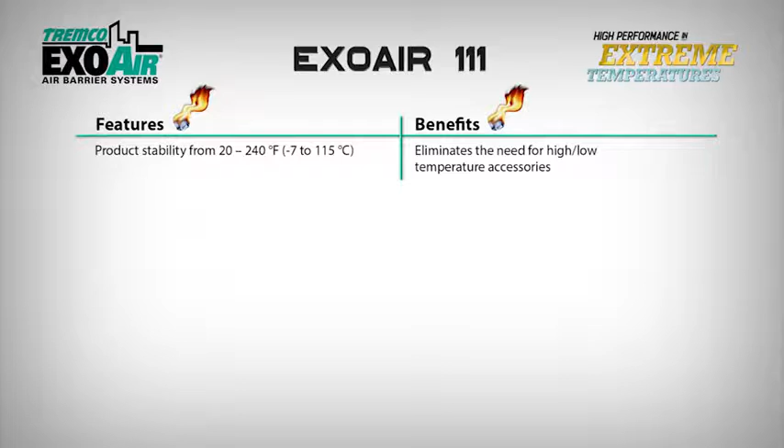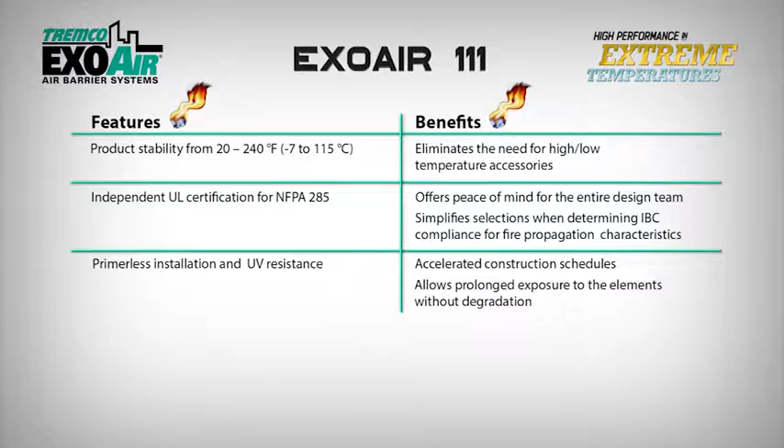It has achieved independent UL certification for NFPA 285 and is uniquely formulated for primerless installation and UV resistance. EXOAIR 111 is manufactured with a uniform 24 mil thickness and a metallized facer, providing low heat absorption.

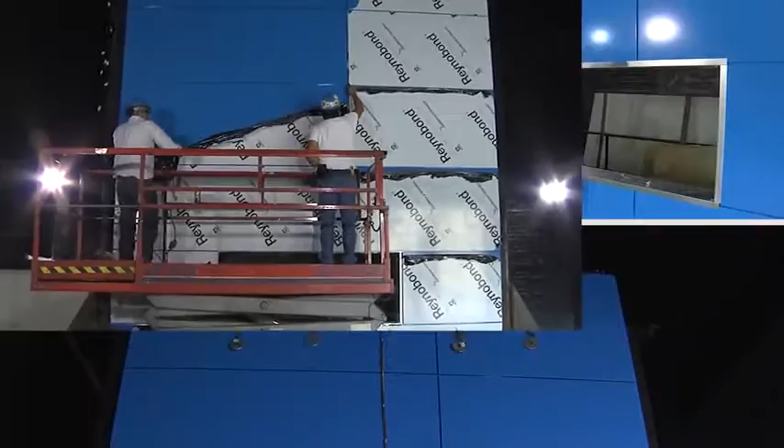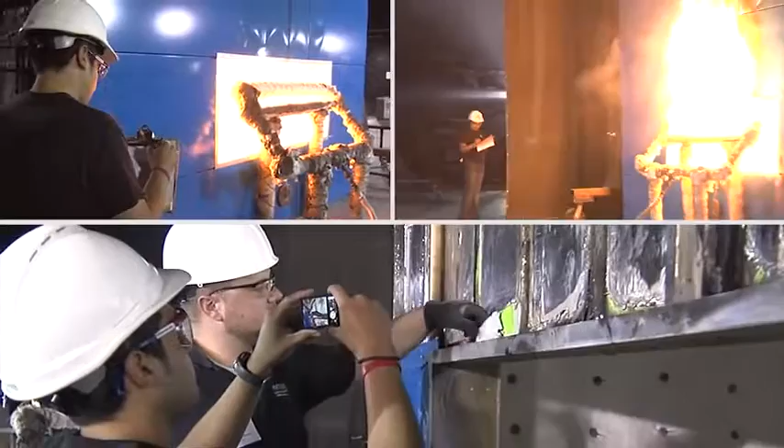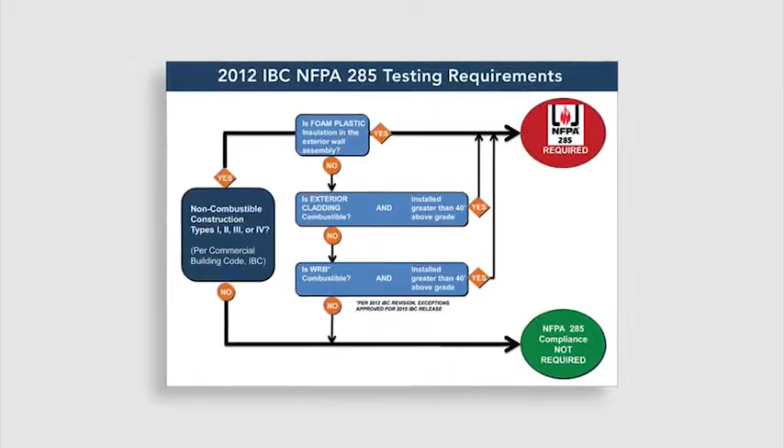NFPA 285 is a flame spread test for a fully constructed two-story wall assembly. The test assembly is exposed to standardized fire conditions to determine if a combination of wall components present a risk for flame spread on the exterior of a building. NFPA 285 has been conditionally required for exterior walls with combustible water-resistive barriers since the 2012 International Building Code was published. There are combinations of wall components that make every wall assembly unique.

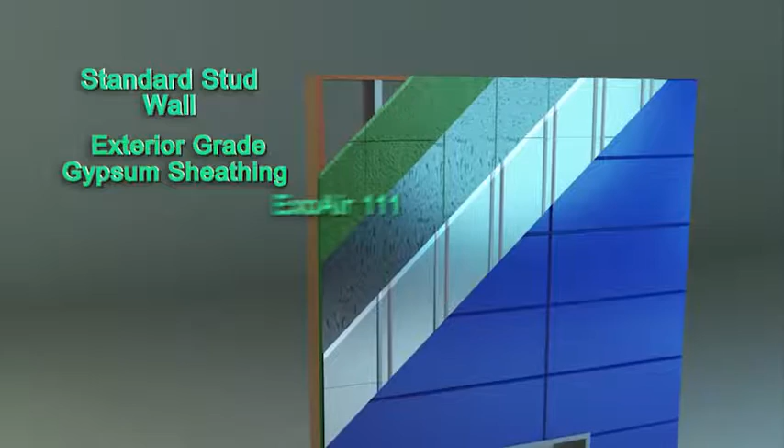During evaluation, careful consideration must be given to each element within the wall structure, such as the structural build, the air barrier membrane, type of insulation, exterior cladding, etc. This wall assembly combines a steel stud structural wall unit with Tremco EXOAIR 111 air and vapor barrier membrane, continuous polyisocyanurate insulation, and aluminum composite panel facade. The wall assembly was tested at Underwriters Laboratories, Incorporated.

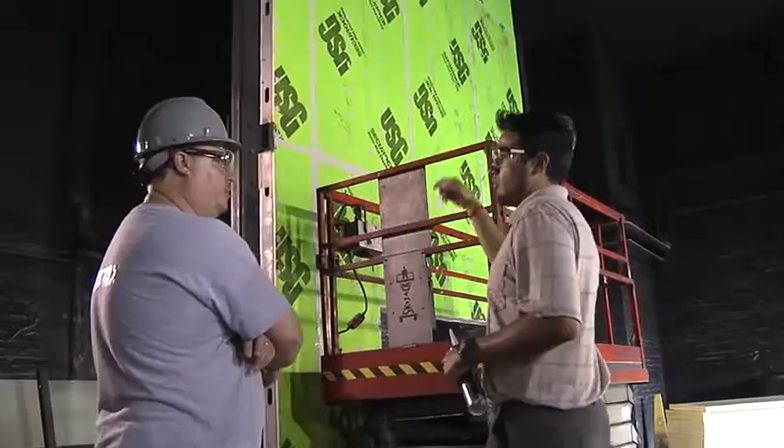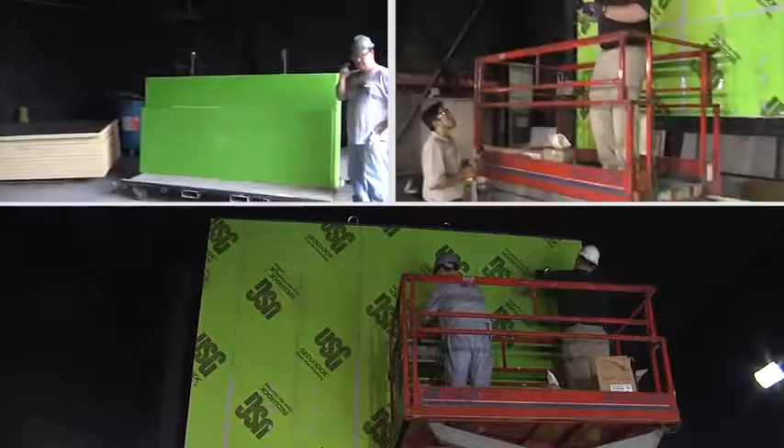The process begins with the construction of the wall assembly. The base structural wall includes 4 inch-long 16-gauge steel studs spaced every 16 inches on center, with 1/2 inch thick interior gypsum wallboard and 5/8 thick exterior gypsum sheathing fastened to the steel stud structure according to the manufacturer's installation instructions. The next step involves detailing.

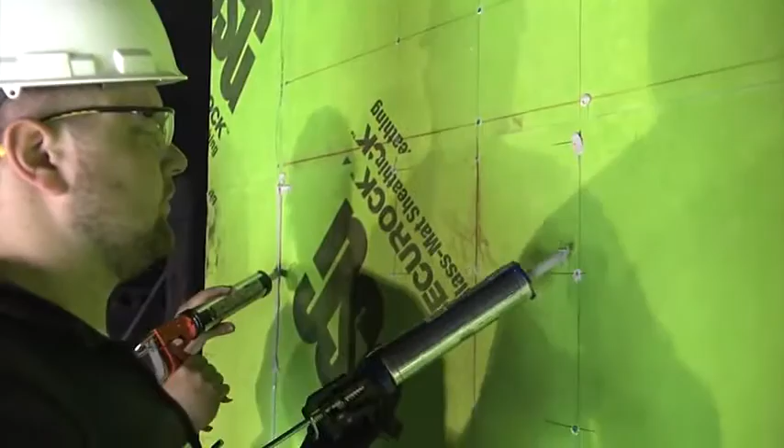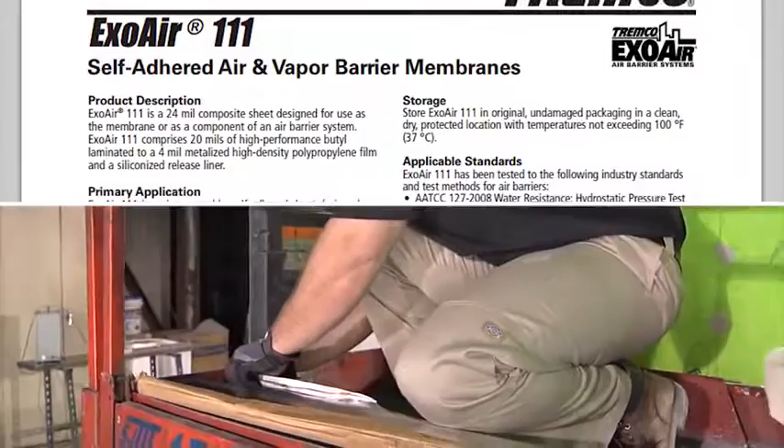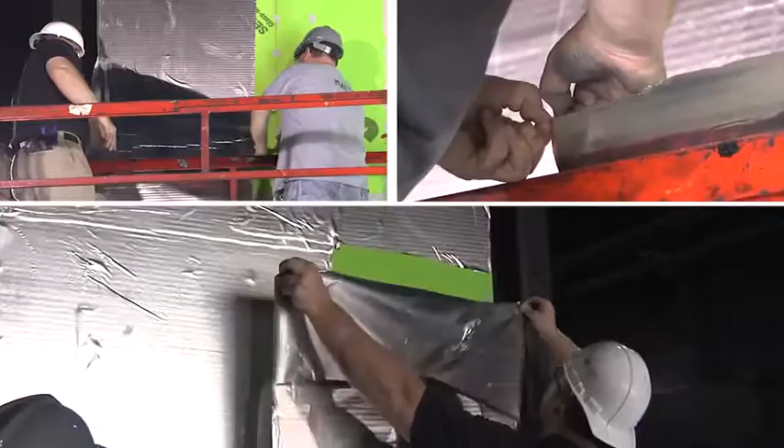In commercial construction, it is best practice to detail all board joints and fasteners prior to installation of the air barrier membrane. For this wall assembly test, all detail work is completed with Tremco's Dymonic 100 single-component polyurethane sealant. After detailing is complete, the air barrier membrane must be applied to the wall according to the manufacturer's application instructions. Tremco's EXOAIR 111 air barrier membrane is primerless, meaning it can be directly applied to the substrate, saving time and labor. Prior to application, it's important to cover the rough openings near the window-to-wall connection.

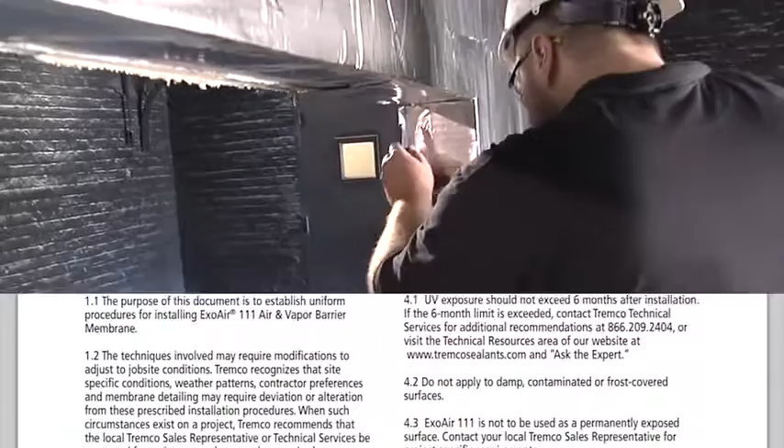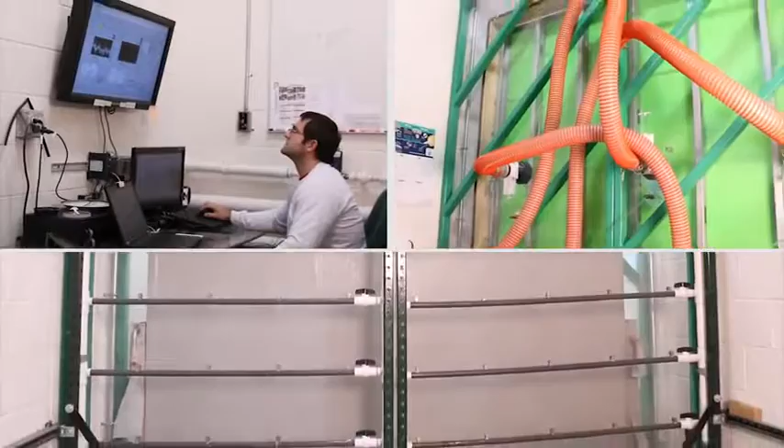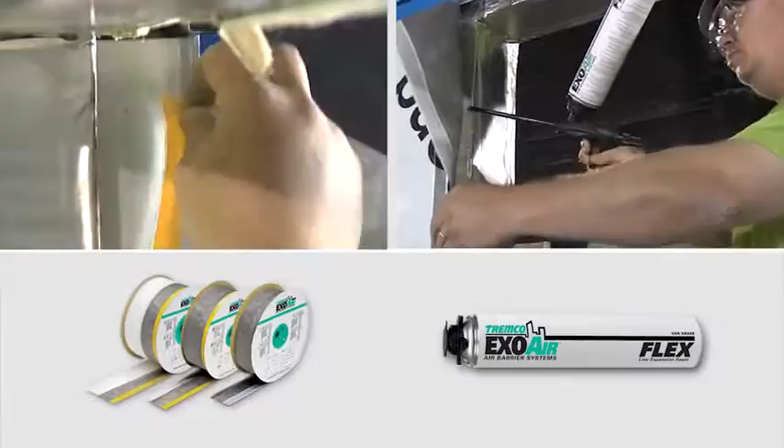Apply the approved air barrier membrane according to the manufacturer's application instructions. Please note that NFPA 285 does not account for, and the building code does not require testing for, fenestration products, such as window flashing materials. At Tremco, our focus is on providing documented system performance for the entire building enclosure, from below grade to roof, including transitions. For this test, Tremco incorporated EXOAIR Flex and EXOAIR Duo, 2 accessory items that ensure a fully sealed air barrier system when connected to the window perimeter.

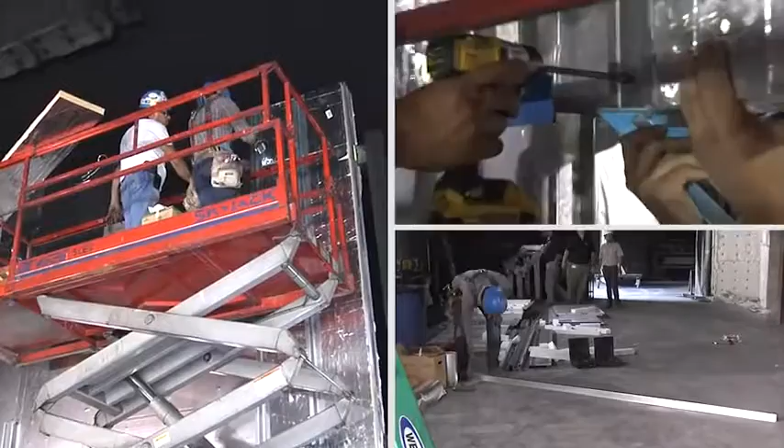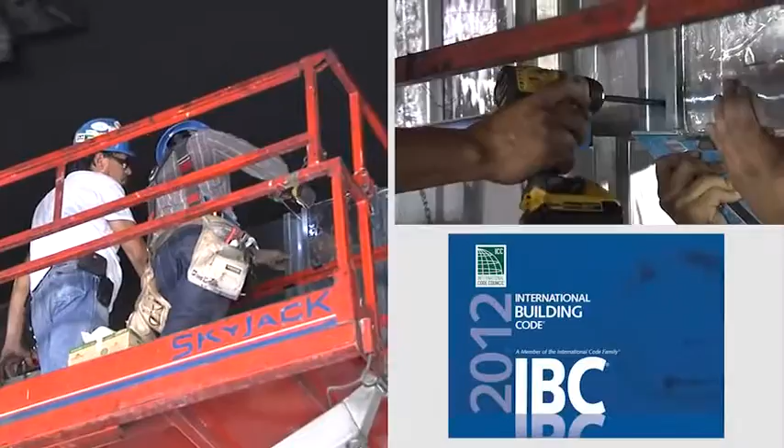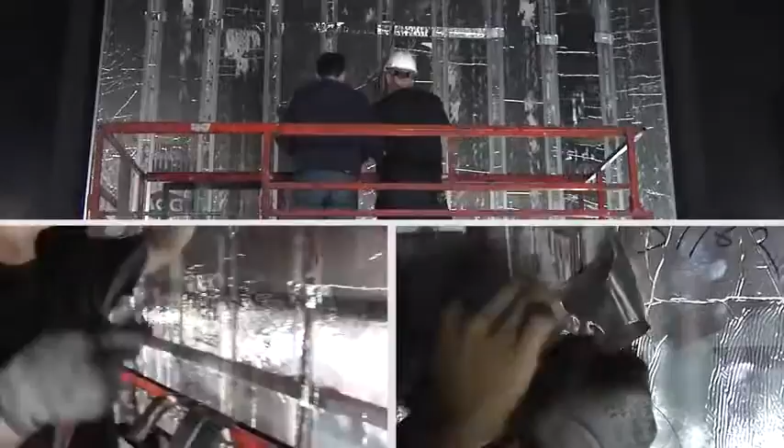The testing process continues with the installation of 2 inches of aluminum foil-faced polyisocyanurate and metal hat channel system according to the product's application instructions. This construction assembly provides continuous insulation as required by the International Building Code. Prior to testing, thermocouples are placed throughout the wall assembly to monitor temperature fluctuations during fire exposure. The thermocouples have individual set limits that cannot be exceeded during the test. Metal panels are anchored to complete the wall assembly.

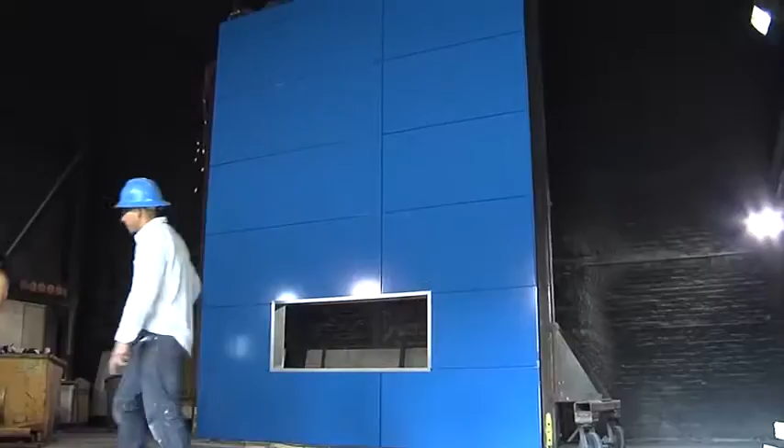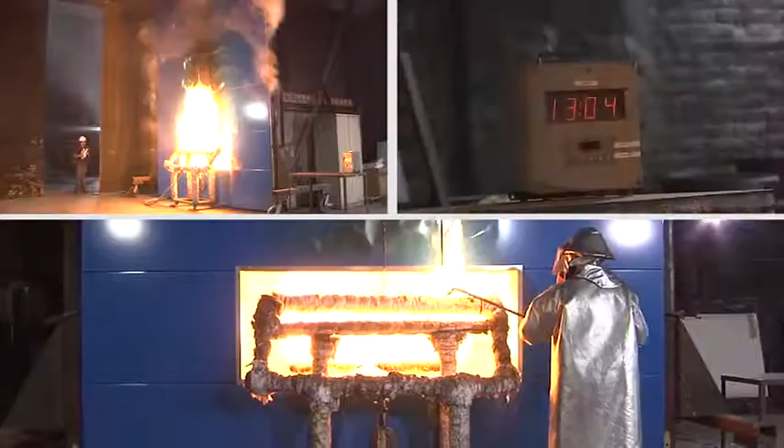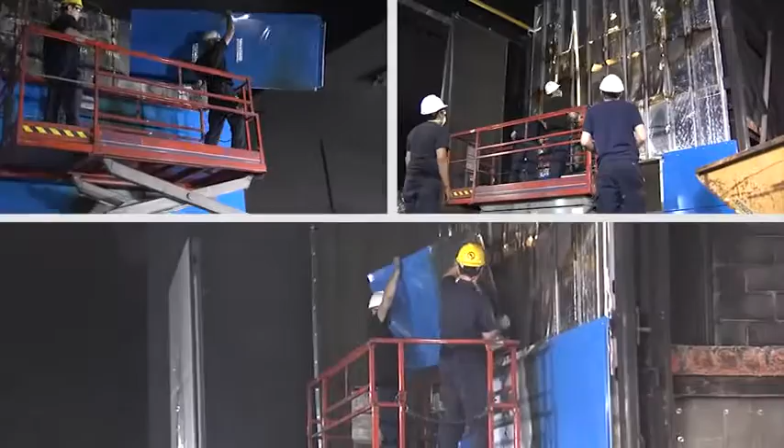Once the test wall assembly construction is complete, the fire source is moved into position and ignited. The fire will be supplied to the wall for a period of 30 minutes. During this time, none of the preset temperature limits can be exceeded throughout the wall assembly. Once the 30-minute time limit is met, the fire source is removed and the self-extinguishing characteristics of the wall assembly are observed for an additional 10 minutes. After the wall assembly has cooled to a safe point of handling, it's deconstructed and the extent of fire damage is recorded and analyzed.

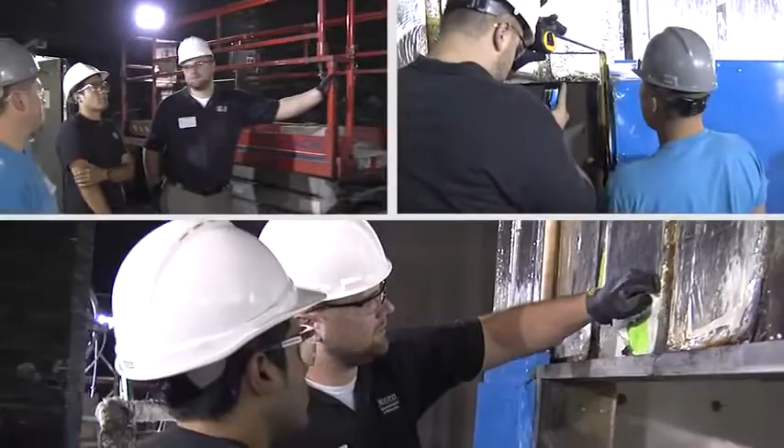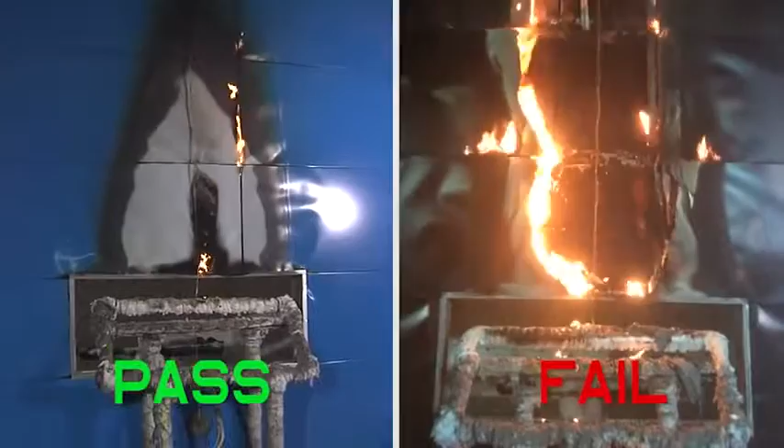After removal and analysis, the test results show that EXOAIR 111 protected the entire exterior sheathing, leaving it untouched and appearing as though it had never been tested. There are a variety of materials and wall assemblies that meet NFPA 285. This side-by-side photo comparison exhibits assemblies that have passed and failed the rigorous testing process. Some assemblies require the installation of mineral wool around the window rough opening due to the flammable nature of the other materials in the wall cavity.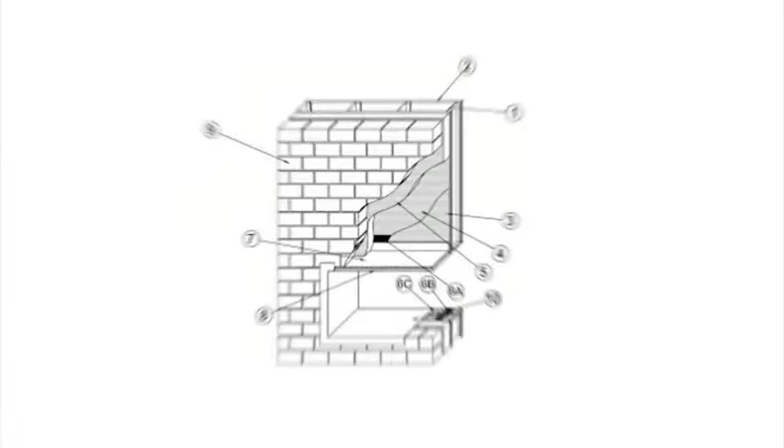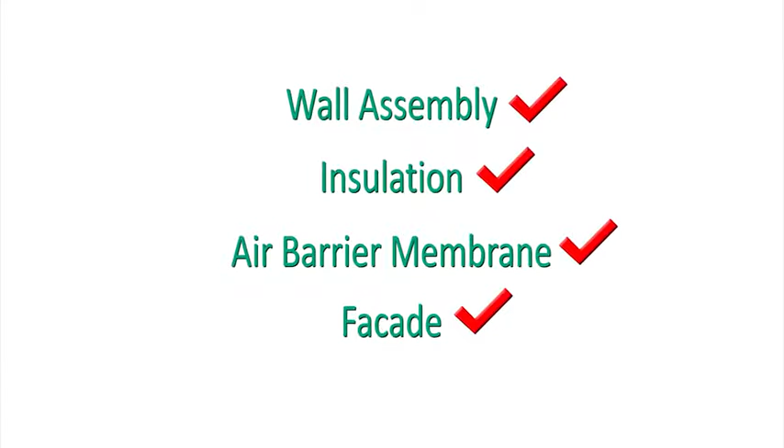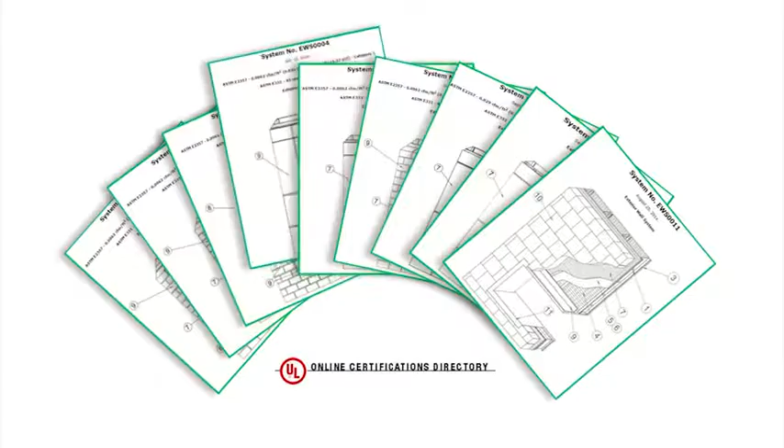In order to meet the NFPA 285 requirement, a wall assembly must contain test-approved products or be reviewed by a qualified engineer familiar with the fire characteristics of building materials. Products have to be evaluated in a variety of NFPA 285 assemblies before a valid engineering judgment can be made. Tremco has multiple tested assemblies listed with Underwriters Laboratories Incorporated that meet the requirements of ASHRAE 90.1 as well as NFPA 285. This makes it easy to identify what system components were tested and evaluated.

To access Tremco UL-listed NFPA 285 assemblies, visit www.tremcosealants.com. Click on Technical Resources on the right side of the toolbar and scroll down to Technical Bulletins. Locate the ASHRAE 90.1 and NFPA 285 defining and specifying to meet IECC and IBC bulletin. Click on the UL listings for Tremco underlined and highlighted in blue. The online UL certifications directory will appear. Type in Tremco and FWFO for the UL category code and then click on Search. The listing of Tremco NFPA 285 assemblies will appear. Click on FWFO.EWS0011 to pull up the EXOAIR 111 NFPA 285 assembly, which contains a detailed listing of the components used.

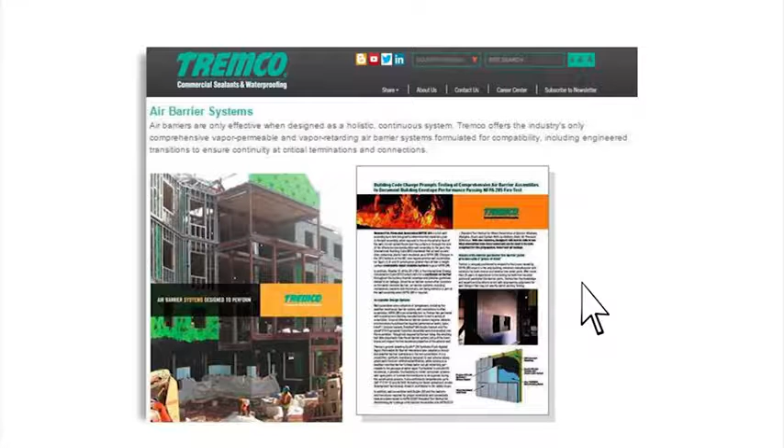When specifying an air barrier system, be sure to confirm with the manufacturer that the product components within the wall assembly have been tested in accordance with NFPA 285. This will help validate your decision.